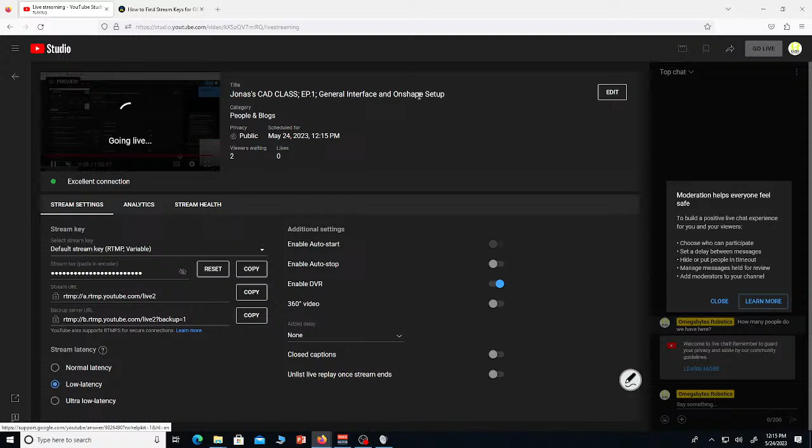My team's coming here to make fun of me.

Let's see what we got. I announced the things, I pinged everybody. Yeah, you announced it, everybody's pinged.

I'll just have no people show up. Yesterday was a nightmare. What's your bit rate for your stream? 8,200 on Ethernet. I'd be worried if you're doing that on guest internet.

Actually, I know how to increase viewership. Watch this.

Jimmy's here as well.

Now we watch. We're waiting on people right now.

Yesterday I had like 10 people, and they all slowly went away. Everybody but us is in school right now.

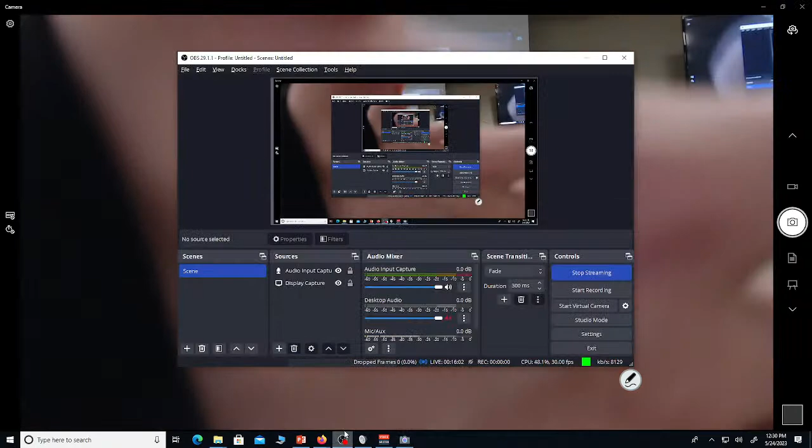He doesn't get it, why do I have PowerPoint open? Oh, PowerPoint open. No, I said don't open PowerPoint. I hate everything.

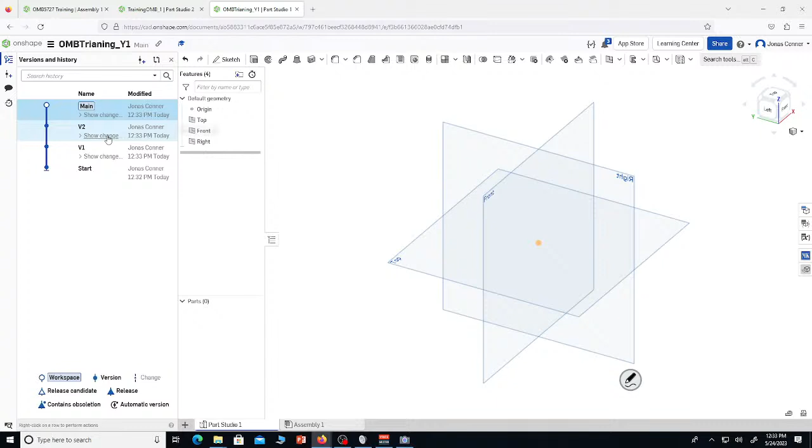First, I want to talk about versions. When you're creating parts and robots, you can create versions, which will allow you to say, okay, here's this version, and then I did some edit, and now I have this new version. So if you have your robot and you're like, oh, I want to change the intake on it or something, you could create a version so you can go between them and say, I want this version to have an intake made of plexiglass with a hex shaft, or this intake made of compression wheels. So it's pretty useful to have different versions of things.

Up here in the corner, there will be this plus key that has feature scripts. This plus key will have different feature scripts, and they're really useful because there are certain feature scripts that allow you to import mathematical functions to create helixes and things like that.

Other features were like, for instance, you don't have to follow along with this. If I had a cube, and I had a hole here. So this hole right here is like, I want this to be a screw hole maybe, and there's a feature script called internal thread, and all you do is just hit the inside, and it'll create threads for you. I don't want to use this tool.

Other one, old thread creator. And it will just create threads for you.

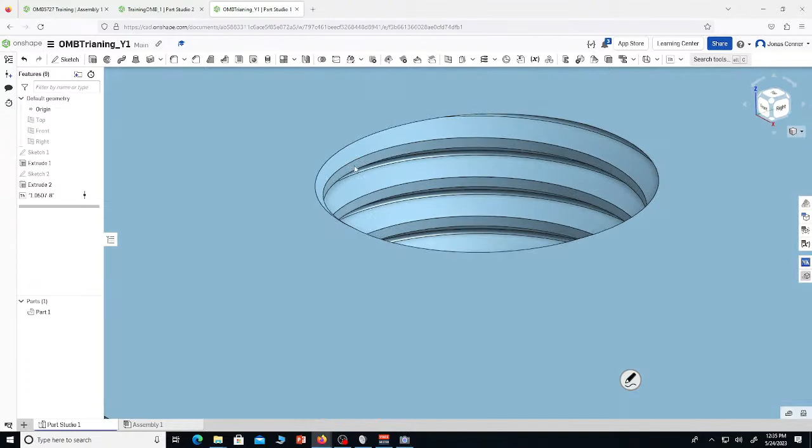Ordinarily, you'd have to create a helix and then create your thread in a triangle, and you'd have to measure that out and align it perfectly to make sure you're in the ISO standard of screws, and then sweep it along there and cut both ends or extrude both ends to make sure that it's properly aligned. This just does it for you all in one batch, so it's pretty useful to have.

We'll go over all of 2D sketching right now. So you'll be right here, your 3D view. You'll have your top plane, isometric. This right here is your different views. You've got isometric, which is your kind of standard view, and then different versions of that, trimetric. You've got different shading settings.

You've got things you can make. Up here, if you want to export a part, you can always print it. If you have the enterprise version of Onshape, which is a paid version, or maybe you get a sponsorship for it, there'll be a whole render studio that allows you to render out parts, and they're actually extraordinarily high quality, very photorealistic. So that exports that image and it ignores the background, which is really nice.

So over here, Sketch, big Sketch button up here, is Shift S. If you get to know your hotkeys, it's really useful. And then this little cube right here is for your adjusting of your view. We're going to go ahead and go to the top plane.

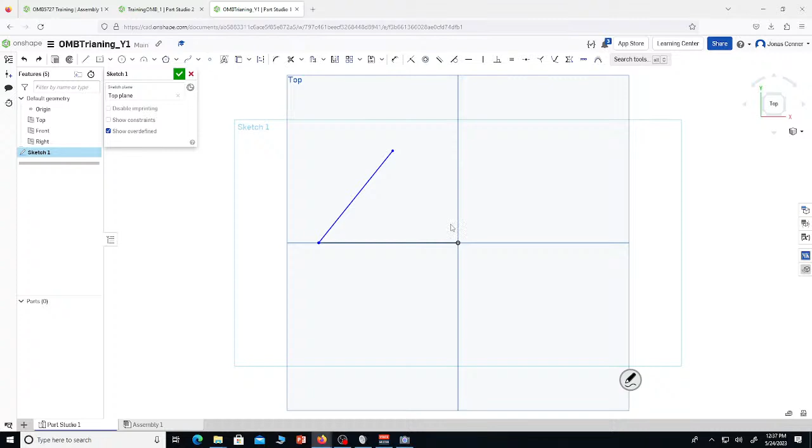So L is for line. Line is up here, simple enough. Lines. Command Z or Control Z, depending on Windows or Mac, for undoing, and then redoing is Command Y, or Control Y on Windows.

Square, there is a corner rectangle, which will be like that, and then you have a center point rectangle, like that. Generally, you'll be using center point rectangles. Then an aligned rectangle, which is basically a 3-point arc, but for a rectangle. These are nice for intakes and things like that, where you need it to come out.

Circles, you've got your 3-point circles. I haven't ever had to use these in modeling, except for like prototyping, but you might find a use for them. You've got your standard 3-point circle.

And then you've got an ellipse. Ellipses are good for making slots for bolts to go through and things like that. So you've got your length of the ellipse and the height of the ellipse. And then 3-point arcs are perfect for like, if I've got, let's say, a corner rectangle right here.

And I want to smooth that out. I can easily use a 3-point arc right here. So you click your 2 points, and then this is the radius. I can make it aligned to those. You can see those little yellow cubes that show up, which means that you're perfectly aligned to whatever it's moused over. So that's easily made for capping that, making it smooth.

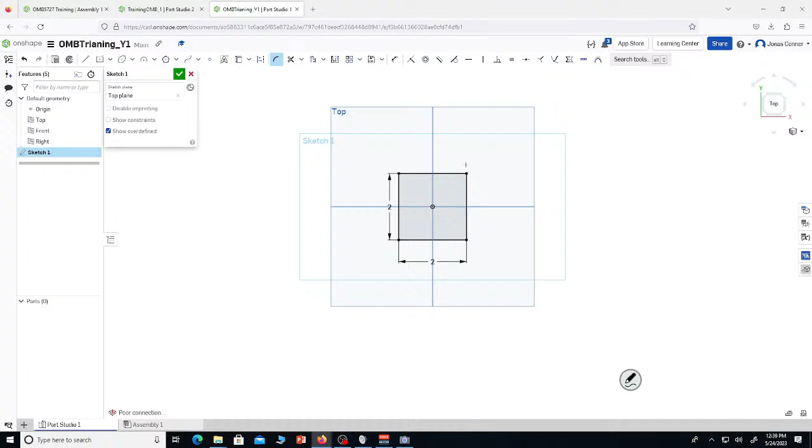So if you were to have a cube right here, and this were to be like, let's say your intake, and then like these corners are going to be touching the cube, you want to select your fillet here, which is Shift F, and smooth those out to however much you want. But you can smooth those out, and then now that won't pop a cube.

That corner might, like if you cut this out on metal or plexiglass, that might pop a cube, but those corners wouldn't. And it saves you, if you're cutting your own parts out or you're having a company cut them out for you, then it really saves you a lot of time on having to file that down yourselves or having a freshman do that for you.

So make sure to fillet any parts that are going to be touching game pieces, and even those that aren't, in case you have something hit or somebody who's messing with it and might get injured. So it's always good to fillet down parts.

You've got your trim, which is for like, let's say I've got a triangle, and then I want to trim things out, it allows you to just cut it out, cut different parts out. So if I've got like a line that I don't like or something like that, you can trim it. I can extend things and split them.

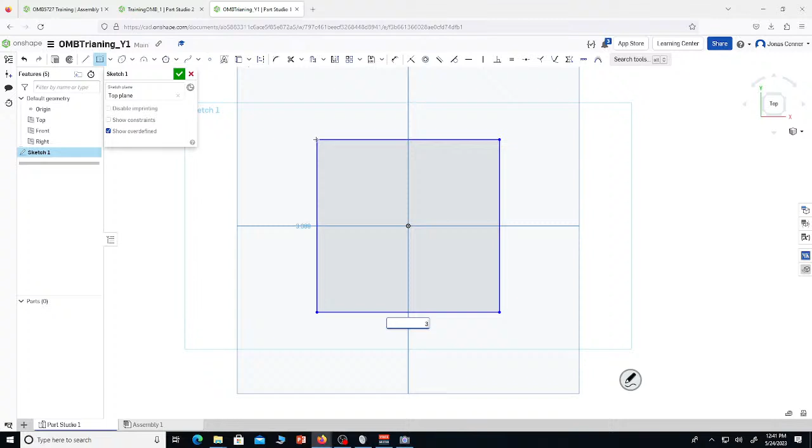Offset's a really useful one. If I have like, let's say I want to just quickly model the chassis of a robot, and then it'll be like 32 inches, I'm making it 3.2 for scale. And then I want to say, okay, I want a 2-inch beam on every bit. I can offset this whole thing.

Offset the whole thing. So drag it all, select it all, enter, and then say like 0.2 inches, 2 inches for scale. And then now I've got this part right here that represents the outside of my chassis. So that works really nicely.

These are your constraints. So if I've got a bunch of lines, if you see that little yellow dotted line that goes on your line, that means it's either aligned to something or it's connected to something or whatnot. So there's a yellow dotted line right here, to represent that it's aligned perfectly to this point.

Let's say I move it over here. This yellow dotted line right here is to represent that it's aligned horizontally. And then this is for vertical. You can see the little yellow dotted line on the line.

But you can always edit constraints. Like if I do this and I'm like, oh, I don't want this line to be horizontal to this, I want to be able to drag this line downward. You can always just select over, mouse over whatever you have, select that and then delete it. Delete your constraints. And now it's just vertical.

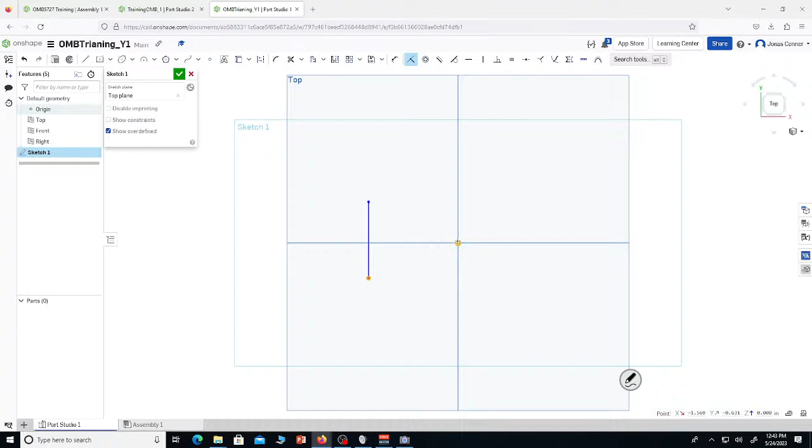That's the only constraint. But then I can mouse over this and say, oh, I don't want this vertical constraint anymore. And all of your constraints are up here, they'll either be in a drop down or be like this. Coinciding is probably the one you'll use the most. It's like, oh, I want this here, over there. If I'm designing, let's say, this is the 2D side view of a robot.

Let's say my chassis is 32 inches by 2 inches. This is the chassis of my robot. I'm going to hide the planes.

Let's say I've got a virtual 4-bar here that's sticking out like that. Or actually a real 4-bar. This is a real 4-bar. So I can mouse over this and make sure that they're always horizontal to each other.

And then I can click both of these lines and set them both to be parallel or equal. That's equal, I meant to do parallel. So undo that, and I can set these to parallel.

Now what I can do is get a point like that. Click this and this and make it coincident. Now I've got to dimension this as 20, 30.

Now I've got a prototype of a virtual 4-bar, or a real 4-bar, sorry. We've been using virtual 4-bars a lot. So now I've got like a prototype of this. And if I want to set this as, oh, this is going to be 8 inches.

Now I've got a 4-bar. And then I could say, okay, how tall is this off of the ground? I can go over here to the measure tool and say, okay, this is 9 inches off the ground right there. So that would hit.

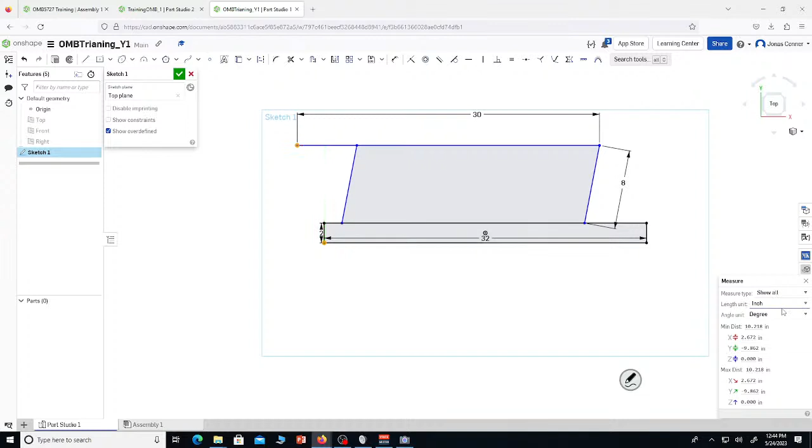Jimmy, how tall is high? How tall is the mid goal? Like a couple feet, right? 2 feet.

Okay, 38 inches. So now what I can do is say, okay, I've got a 4-bar that's going to go all the way back here. We've got one that's going to go all the way back here. And then these are going to be parallel.

This is going to be, I don't know, whatever it is now, 30. Now I've got a 4-bar that goes back, folds up all the way back here. And that extends a lot more because I said it'd be whatever. Dimension that, say 28 inches, that works.

This is now longer. So now this design, if I were to build it in real life, could easily - now it folds up all the way back here, but it could easily reach up, and let's see how tall off the ground this is.

39 inches. That's mid, right? Yeah, so that could hit mid. And I might not have had the confidence that I could make a robot with a 4-bar that could hit mid. And if you do a little redesigning, you can actually find out that you're able to make a 4-bar robot that's able to hit high. So that's pretty nice. And that's kind of one of the useful things about doing a 2D CAD sketch early.

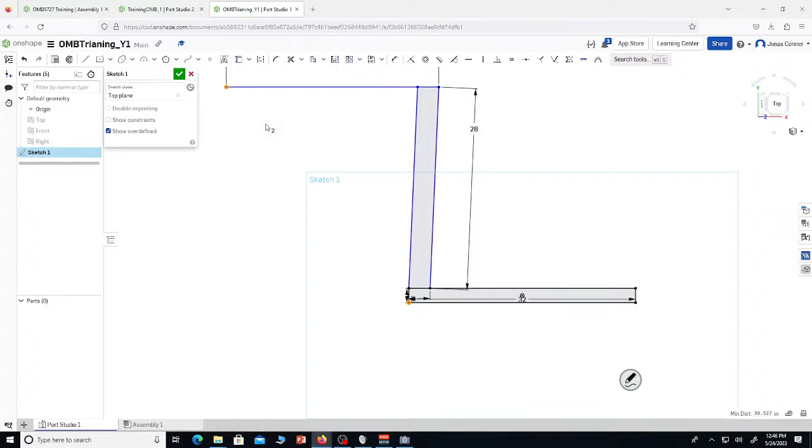So I'm going to start showing specifics on how to do things. So if I were to say I want to make a chassis of a robot, we're going to go make a bar. We're just going to make one bar of the robot.

Say, okay, it's going to be - what's our chassis dimension? 25 by 29. Okay, so we're going to do a 29 by 29 robot. Actually, we'll do a 30 by 30 robot. So 30 by 2.

So I hit Shift E to extrude, and if I go into my sketch, it goes back into it. The extrude button is here, revolve is here. We'll go over revolve in a little bit. You've got your extrude. And I can always edit this sketch and say, oh, I want this to be 1 or whatever, and it'll edit it. So I've got this bar right here.

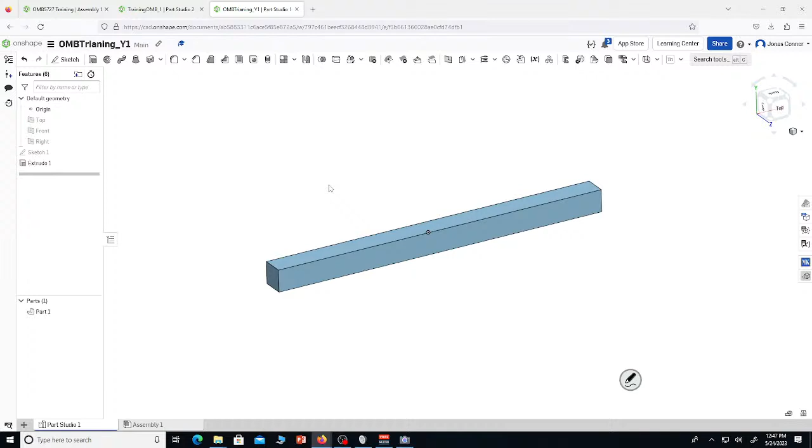Then we'll put some holes in it. So we'll create a sketch, Shift S, create a sketch on here.

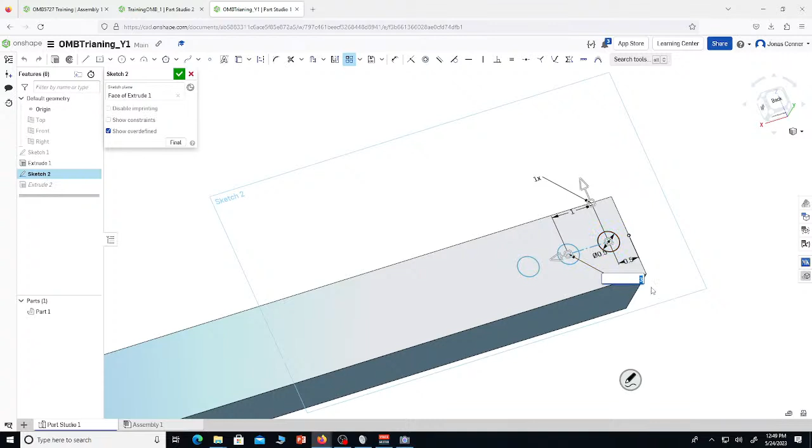Linear patterns are probably one of the most useful tools in CAD, period. I can set this to negative 1, so the holes are 1 inch apart, going in the other direction. Then I say I want 30 of these holes, and it won't render the middle holes, just the start and the end.

Click anywhere off of it to deselect, and it'll update that part, because the extrude has faces of sketch 2 selected. So I can go over and click sketch 2, and it'll select all the faces of sketch 2. Now I've got this beam with holes.

What I can do now is go to my assembly.

So go to my assembly — any questions? No questions. Go to my assembly, and I can say insert, then select this bar right here.

Now I can insert like 4 more of those. Imported 4 of those — I think I imported one too many.

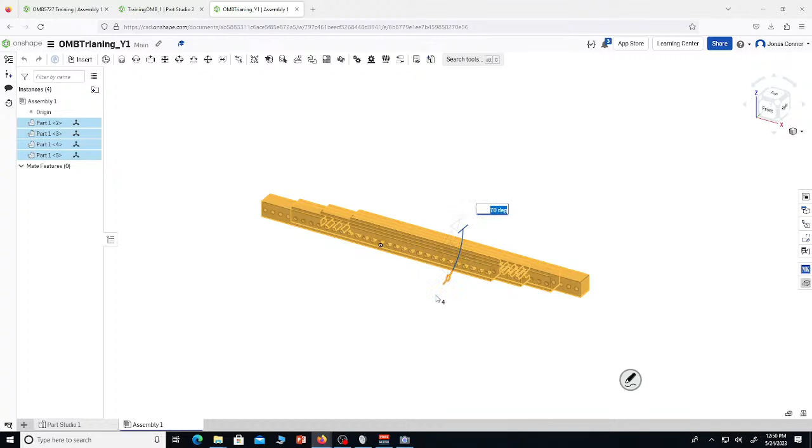So then I can take each of these and rotate them 90 degrees.

Andrea, you paying attention? Andrea. I'm going to steal her drink. Give me a second. Andrea fell asleep in my class. She's not very dedicated to the learning experience. Some people just aren't on that grind.

Okay, set this at 90 degrees. You paying attention? You better know how to do this when we're done.

You had a dream about it? And you know why you had a dream about it? Because I'm teaching it.

So I can say, oh, I want to move these around. Okay, so we'll have these two here. I can go to my top plane and say, okay, I want this part to be here, and I want this to be here. And then I'm going to rotate this one.

90. And rotate this one by 90. I'm not mating these or anything, not connecting them mathematically. I'm just using this as a reference.

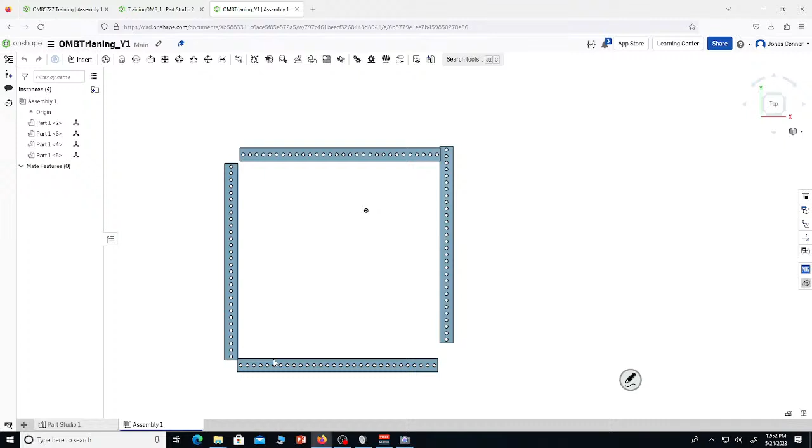So this has taken me about 5 minutes to do, and if I wasn't teaching, it'd take far less time than that. I could say, okay, connect these right here, and boom, there's my chassis. Or I could use corner joints here so that the chassis is perfectly square. I could say, okay, this is my chassis.

Real quick, I want to go over to the App Store. Go over here to the App Store, and you've got all sorts of different stuff. You've got free data management, free simulate — now, most of the stuff costs money, but you can look for free. There's all kinds of free stuff. This is free — you can import Google Sheets to reference off documents, all kinds of stuff.

What we're going to look at right now is MKCAD — the MKCAD library. This right here has every single Onshape, or every single FRC part, every battery, nut, screw, bolt, hex shaft, whatever.

So I can go over here and say, oh, I want my swerve modules, and I want a Mark 4i swerve module with a Falcon as a steering motor, or a Neo as my steering motor, and a Falcon as my drive motor. Insert. And I could say, oh, I want a Swerve X with 2 Falcon 500s, and insert that.

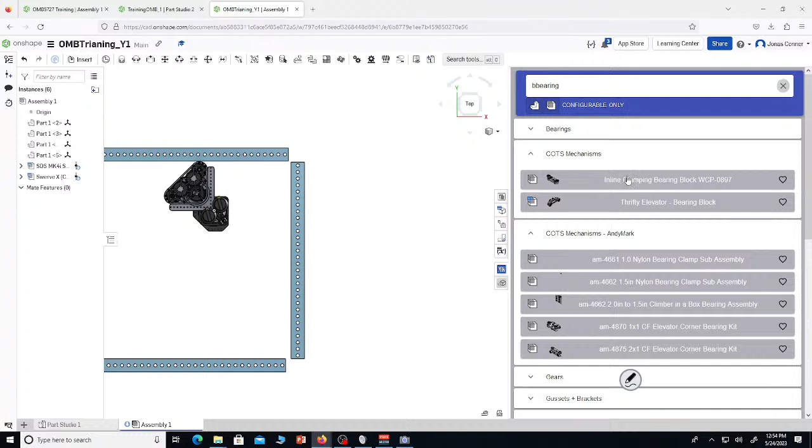It's like, oh, those will need bearings, and look — I can find the specific bearing that I need. It's got every bearing, every wheel, every piece of wire — literally everything you could find in your machine shop.

FRC — you've got pulleys, pneumatics, motors, hubs, gussets. There's literally everything in here, every single part, and it's all cloud-based. This isn't taking up any space on your computer. It's even got the game elements here, so I can say, oh, I want to test my robot in Onshape.

I can click the cube and the cone, and I can say, oh, I've got my entire game piece. This is my scoring field. I can ask, could the robot come up and grab from this? So I can test this all virtually, really easily.

You won't have a problem with SolidWorks or Autodesk products if you've got a powerful computer, but when you have this, it just makes everything so much more convenient.

I can take these swerve modules and say, oh, I want this to be over in the corner. Just move it around. I'm gonna align that right there.

I'm not doing this mathematically, I'm not mating anything - this is just quickly done. I'm not using any tools to do this, I'm just dragging everything around.

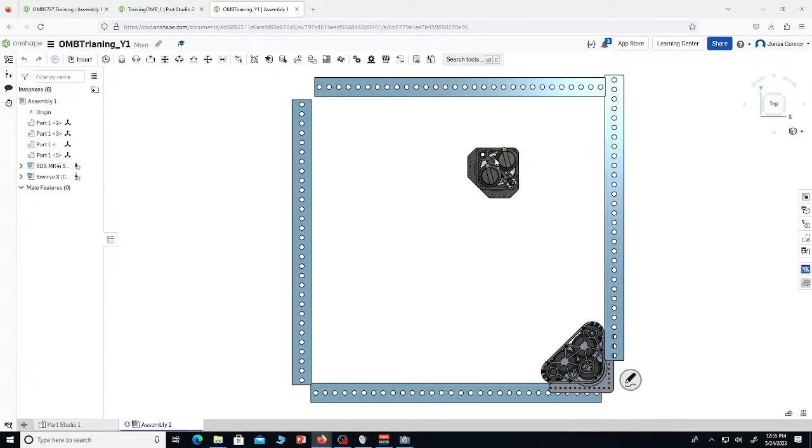I'm gonna attach my swerve module there, and say, oh, those holes I made don't align - this wouldn't work. Then I'd go and remodel that. Go over here - those holes don't work either. And the wheel's too far off the ground for it to be legal, et cetera. So this is just a quick way to get rid of imperfections in your design.

I'm going to be right back really quick, just for a moment. Just hold on, I'll get back to it.

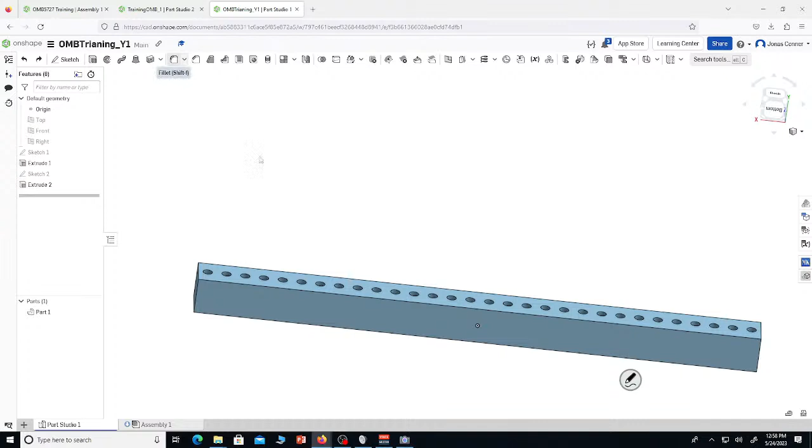I don't know, you fillet your parts, you're not going to pop your cubes. It's that simple. There's probably more popped and broken game objects this year than all the other years combined - I mean, those cubes were basically made of cling foil.

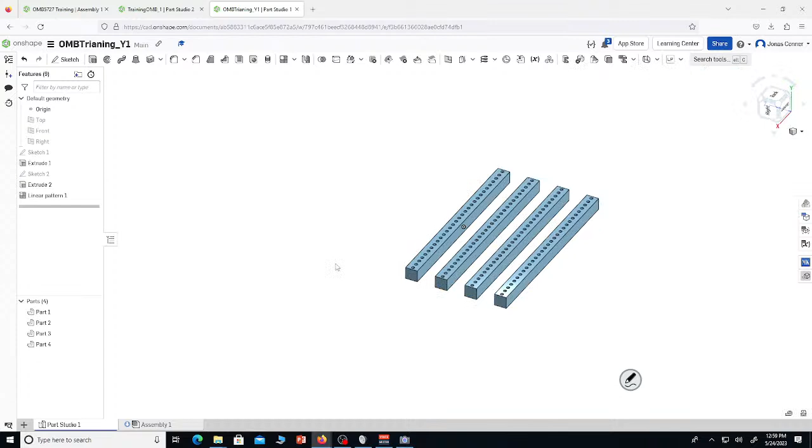So that's a linear pattern. Rotational pattern, circular patterns are pretty nice too - I'll show everybody an example of what those are good for.

I'm gonna get rid of all that. So if we've got like...

We'll unhide our planes, hit P. We'll go to isometric view, and then I'm gonna align ourselves to the top plane.

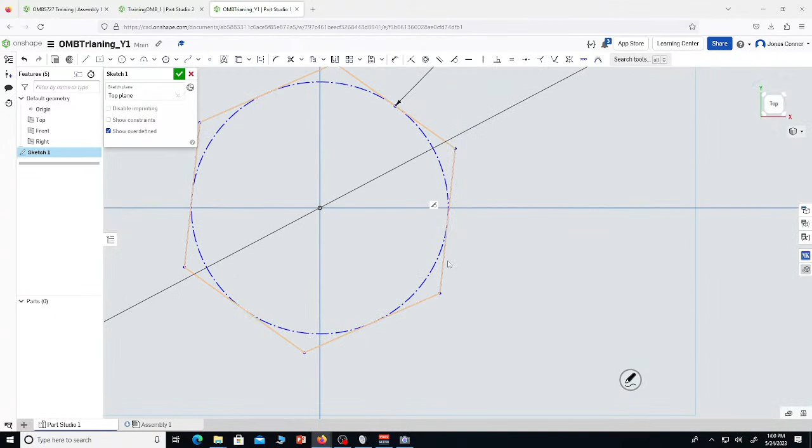That a 6, because hex shafts have 6. We'll make a line from the middle of this to the middle of this, and then make that horizontal so that our hex shaft is like that. We'll make it a 1-inch hex shaft.

And then let's say I've got here, and then my motor, I need like screws or something like that. What I can do is make circles here. I can say, okay, I want a circle right here, and I want a half-inch circle right here.

And say, oh, I want a circular pattern. I can select this, and it'll do it for me. There's a little box right here I can move around anywhere I want, and it'll move the circular pattern. And then I want, I don't know, 7 of these holes. You can set it to be any number of holes. I want 6 holes. Now it'll make these holes, and then when I'm cutting out whatever part this is, I can easily just extrude this out like an inch.

Extrude this out like an inch. Actually, I'll do like a 1/4 inch.

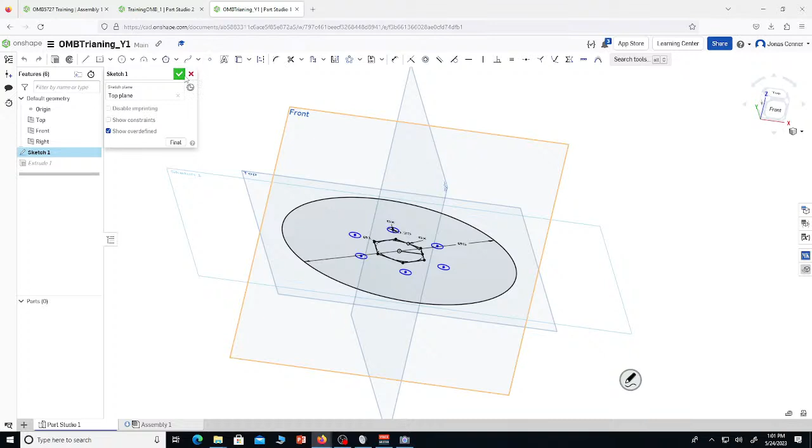That was a good time to mention: when extruding parts, or when typing anything really, so this extrusion, I can say like a 1/4 inch part. But I can also say square root of 16, right? That's 4. Or 1 over square root of 16, that's a 4th. Or I can say 1 divided by 1 over... you can do any mathematical operator you please in here. So if your math teacher decides to have you model something, you can impress them with that.

So this would be like my plate that I'd cut out. I'd stick a hex shaft through there or whatever.

We'll go to our public document real quick. This is our public Omegabytes document. This is this year's robot.

One thing that's nice: this larger assembly, it takes a while to load. It'll take a minute, but even on a good computer, an assembly like this in a non-cloud-based software could take forever to load. Honestly, we've been using SolidWorks for like 7 years, and every time we try to open an assembly on an updated version, or an assembly that we added some part to, half the time the assembly would crash and we'd have to go back and fix some part.

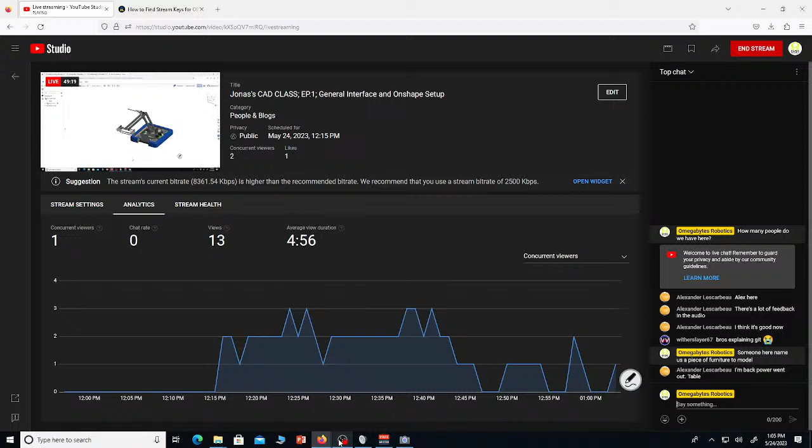Table. Alex says table. We're going to model a table.

Okay, we're going to let that rest. If you have a computer that wasn't made in 1990, you should be able to load the large assemblies.

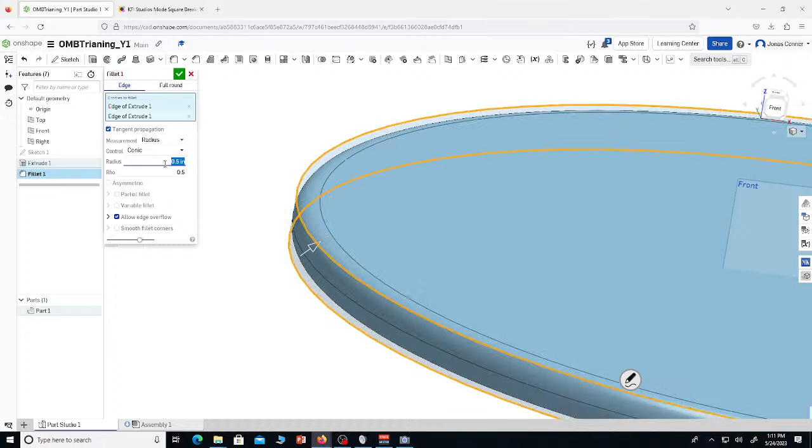Now I've got 2 fillets going on here, so it's a little bit smoother of a pancake. I can right click this part and set the appearance as well. Edit appearance, and I can say I want this to be gray. There we go. I'm gonna go ahead and hide my planes.

How big is this? I'm gonna say that's 4 inches. So that little yellow cube right there, little square, you can zoom in and see it. So that, and then it's selecting this center point. That means that I'm aligned to the center point.

So that's a square, hit C for circle. Expand that out a bit, 4 inches. That go up. I'm gonna say this table is 3.5 feet tall. 3 feet, 3.5 feet.

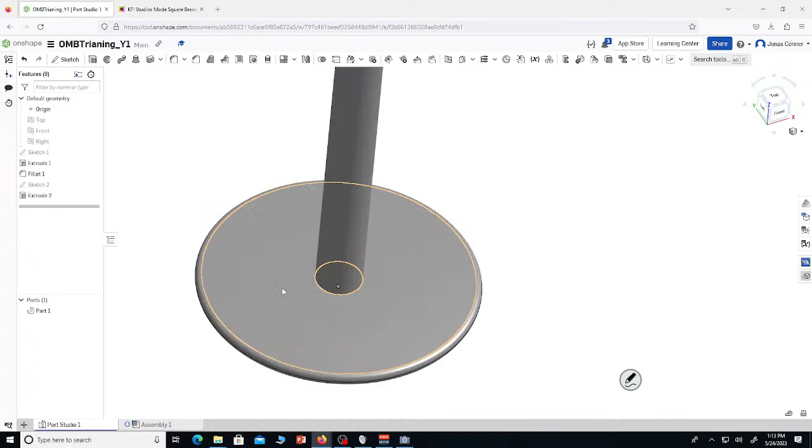There we go. And then I can fillet right here, like 1 inch, 2 inches. And boom, now I've got that. And then I can also select the shaded without edges. Now all of those little lines are hidden, it looks a lot nicer. Yeah, so that's all one part.

And then I can say, okay, this goes up, and then this table, we'll say that's like 1.5 feet by 1.5 feet. So I can create a sketch on top of this.

Now once I create a sketch, I should have mentioned this a lot earlier, but once you create a sketch, I can say, so I haven't clicked anything. All I did was create a rectangle, hit the middle, then expand out, and say 1.5. Now I immediately just started typing, and it'll dimension that. So it'll immediately automatically dimension that stuff for you if you were to start typing dimensions once you create a rectangle. So I can say 1.5 feet, 1.5 feet.

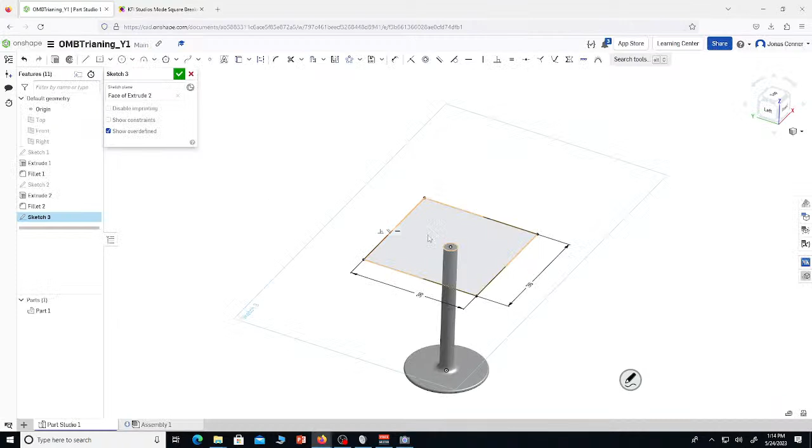Now it actually looks to be significantly bigger than that, so we'll say that's like 3 feet. There we go. And then I can say, okay, that's probably like 1.5 inches tall. I'm just kind of eyeballing it, you know.

The best way to get practice for modeling is to keep doing. And I can actually make this a new part, so I can have the top and the bottom of the table be a different part. But what I can also do is have it be the same part, right-click this feature, and then say add appearance to feature, and make this like a wood color. And then boom, now I've got this table kind of done.

Need to fillet out all the edges of the table. Maybe I can get away with full rounding it. No, I can't full round it. So I can say like, okay, fillet out this top face here, bottom face here, and then make it like less than that.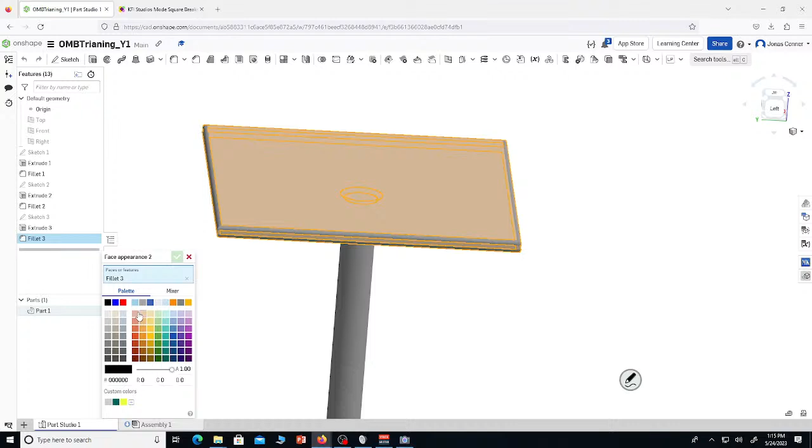I created a little kind of cool little design. And then I kind of added the appearance to this feature and say I want this to be wood color. Then I can select this face right here, bottom, these faces that are created by the fillet.

Tomorrow I'll have a little thing that displays what keys I'm pressing while I'm pressing them. Just to add appearance to these 5 faces and make this like a gray.

And then I can go over here to my appearance tab, and I want this part to be that same dark gray.

And now I've created a nice looking table that I could easily right click here and export as an STL, and 3D print this out to have a nice little table.

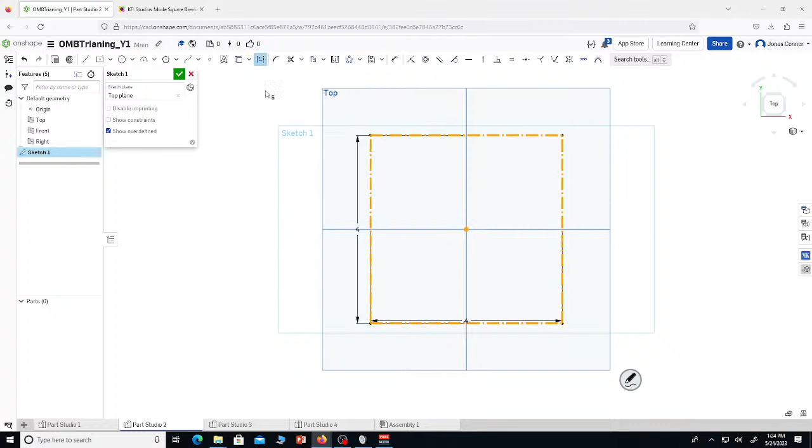Now what we're going to do is select all this right here, and we're going to make this construction geometry. Boom, so this is construction geometry. Now when I extrude it, it doesn't count, basically. It just doesn't exist when I try to edit the part. This is purely here for reference.

Now what we're going to do is create a rectangle right here. Now this is a really important lesson, what I'm doing right now. So if you've got anyone not tuned in, make sure to get them to tune in. This will be pretty significant, because I'm going to hit a lot of important things on this part of the video.

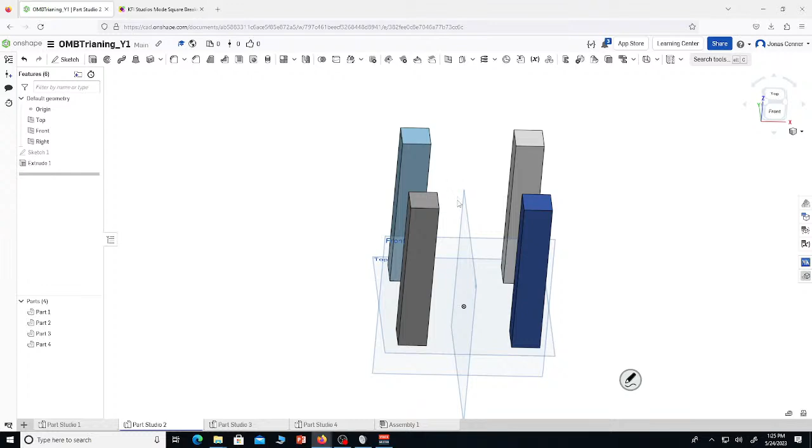There we go. So this will be the 4 legs of our table. I'm going to extrude these. They're going to be so just tall, pretty tall table. Okay, so now I've got each of my individual parts. Now we're gonna make an end table. That'll be the type of table we make.

Now I did this yesterday, but yesterday was kind of just a test run day to make everything work, make sure everything works.

So we'll go over. I don't want to be in shopping, I want to be in images. I found a really good table. This is our table from yesterday. So I can easily download this image. I already have the image, so I can replace it.

And then what I can do, I go into this front plane sketch right here. Hit the front plane, and then I can import an image right here as a reference, which is really nice. But what I'll have to first do is import this image.

So I'll import that image, and then I can use that image, and I hit that, and then I can drag it outward. Actually, I'll redo that. I don't want it defined to anything, so I'll just tab the image, and I'll put it over here. And then boom, now I've got my reference image, and even if I complete this sketch, it'll still be visible. It'll only go away if I hide this sketch right here.

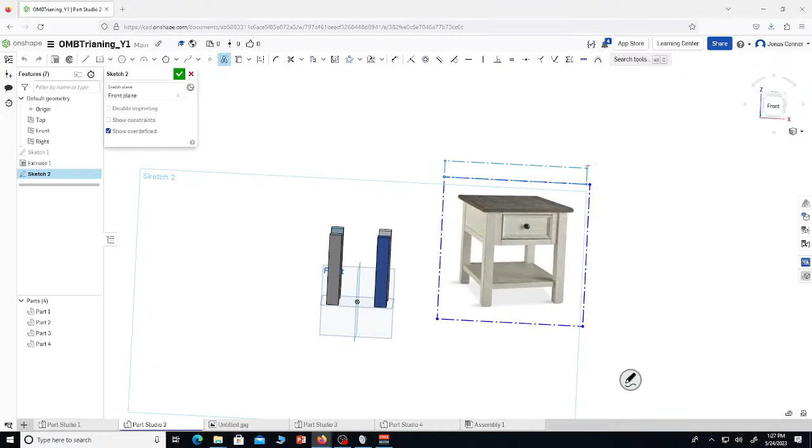So this sketch is basically just that image, that's what it is. And I can even go in here and put some text up here, say like, oh, I want this to be... I'm gonna move this around over here. Yeah, okay, that's my table.

So now I've got my end table, and I kind of want to say, okay, we've got that top bit kind of cube into there. This little thing kind of goes into it. So what we'll do is we'll create a plane.

What we're actually going to do is this bottom bit here first. So we'll create a plane here, and we'll use the top plane as our reference, and we'll offset that by like an inch.

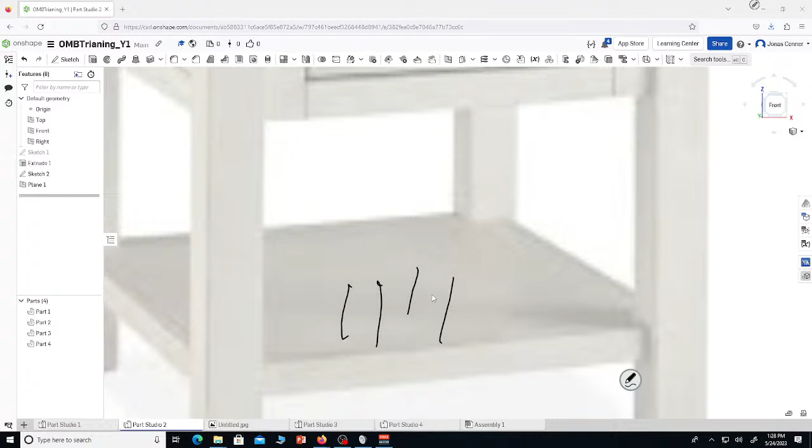So we're making, just to be clear, we're making this little section right here. So you've got your table. We're making that bottom bit. Got our table. We're making this part right here. We're making this part of the table. This right here. This is what we're making. This part right here.

If you're wondering how I'm doing the drawing, I have a tablet, like a Smart tablet - that's the name of the company that makes them. From the college that I'm at right now.

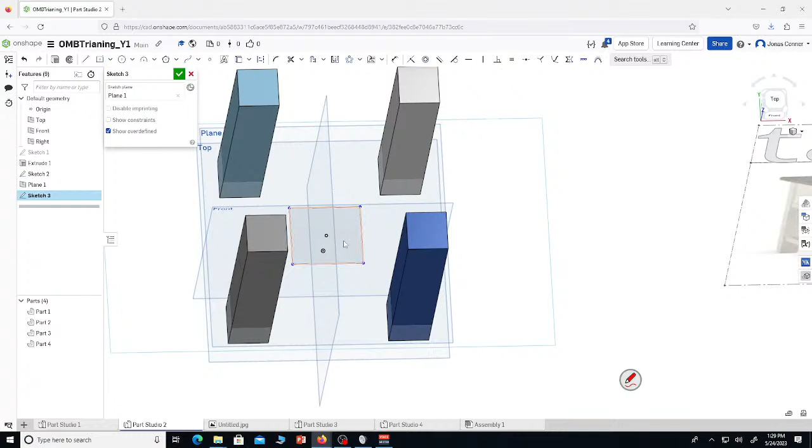Using their stuff. So I'm gonna make a square right here. I'm just gonna put it right there. Notice I have it aligned to the center. And what we're gonna do is I'm gonna make a line.

So I'm gonna hit U. This allows me to basically take any geometry that I want and just grab it. So if I have like this corner over here, I can put that down onto that point, right? It puts it down onto this plane. So if anybody has any questions about that, ask them. But I click any geometry and it just basically puts it onto that plane that I'm sketching on right now. It'll just use that as reference.

So now we have this. I'm gonna say this is like, I'm gonna make a line. Goes this way, like, I don't know, an inch. No, not an inch. Okay, what we'll actually do is make two lines that go this way by like 0.2, and then this way by 0.2.

What I could do instead, now this isn't the same measurement, but if I want to do one line, I could say like, oh, this is going to be, what's the Pythagorean theorem? The square root. I'm going to dimension this as like, I don't know, square root of 2 plus - I haven't taken math this semester, so I'm a little rusty. Calculus 1 was last semester. I don't know what that is. I don't know what I just made.

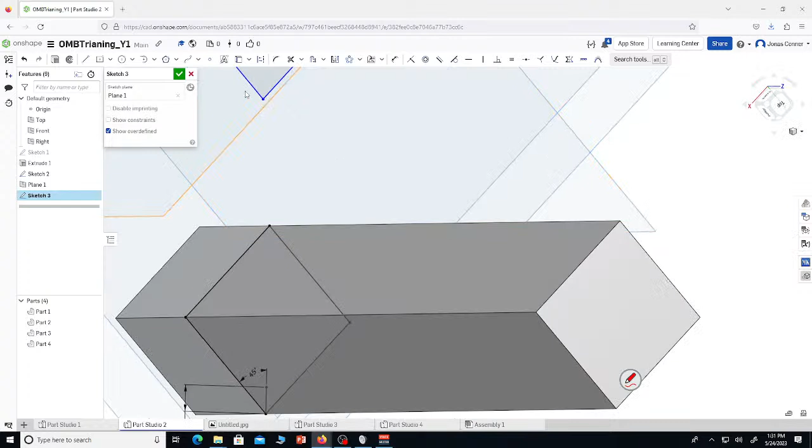Okay, and then we can hit D for dimension. This is an important part, pay attention. If I hit this line and this, I've hit 2 lines. I can make a degree, I can say this is 45 degrees. Now it's perfectly facing the center. And now what I can do is hit this point right here, and this point right here, and it'll make it coincide.

So then I can hit Shift E and extrude. Get rid of all that, I just want to extrude this face right here. And then I can hide this part right here. Which part is that? I'm going to hide that part. Extrude that, and then hide that part. Extrude that. So now I've got all the corner bits selected, right? Double check that, so I've got all the corner bits selected, everything I want.

And I can make it symmetric, 0.2. So making it symmetric, so this yellow bit is the plane, right? Yellow bit's the plane, so it's extruding this way, but if I make it symmetric, it'll do half as much both ways. So I'll make it extrude through. And then I can show all this.

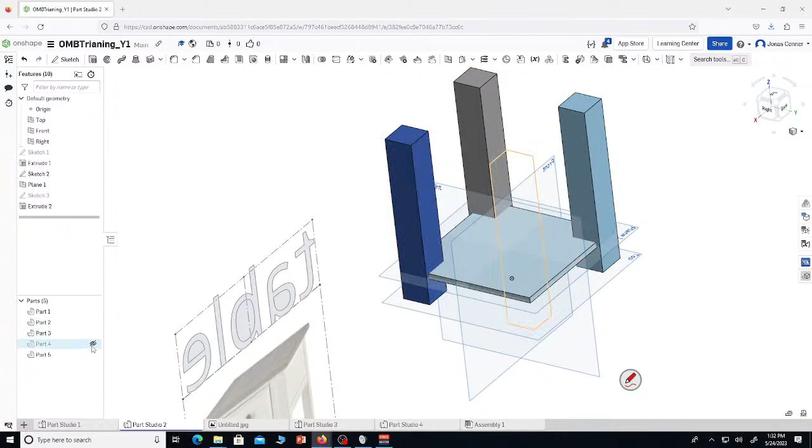And boom. And then what I can do is, now that I have that, right, so that's that middle bit right there. You know, it doesn't quite intersect the edge. I can do the same thing with the top plane. So what I do is create a sketch and then use this geometry right here. Then I could just extrude it downward.

Do that arrow and make it go the other way, and then say like, boom. And then now I've got my table, right?

And then I can go on top of this, make another, like, let's say 5.2, I guess that's probably a good measurement. Screwed that up by like, you know, a tiny bit. And boom, now I've got kind of the same kind of shape going on. These are obviously a lot thicker, you know, it's a little different, but it's good practice to do things like this.

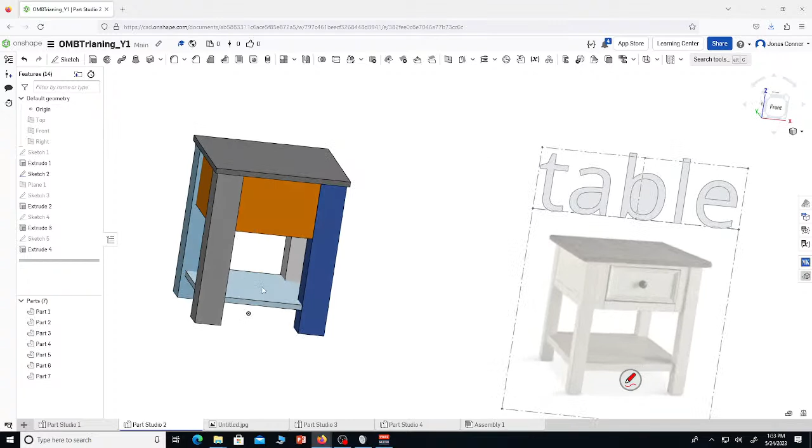Now you've noticed I've made these all individual different parts. We'll get to that in a little bit.

Then I'll just do the front drawer real quick. I'll go to the front plane. Okay, I'm on the front plane, sketch out that drawer. We'll align to the middle of that, and then the middle of this line. We'll take the center of that and go out just a bit.

2.25 and 1, and we'll remove that bit there. Then we'll take the inside of this right here, and we'll offset it. Put a sketch on there. Then up here is offset. Offset that by like 0.05, then extrude the drawer back out.

That would be like 1.05, stick out the tiniest bit. Now you can see the drawer kind of goes out a bit, and then it goes in, and then it goes flat, and then you have the doorknob, right? So what I can do is say...

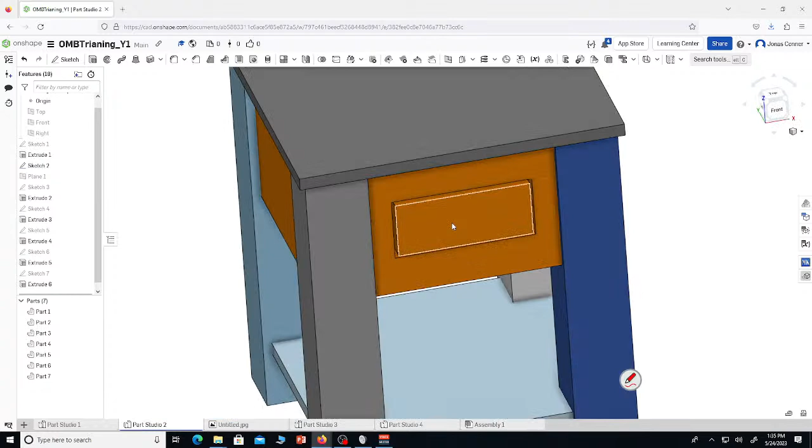Create a sketch, and then offset that, have it go the other way. I don't know, 0.5. There we go, I will say 0.1. And then extrude that in. Hit remove. Nope, not surface. Hit remove, and then hit 0.1.

Now in CAD, there's really no wrong answer, as long as you get it done, you know, there's 1,000 ways to do everything.

And then I'm going to actually make that, what I'll do is make that fourth as much. Hey, hello, okay, the lights just came on for some reason. I don't know.

And then we'll chamfer that, 0.1. Okay, that goes in a bit.

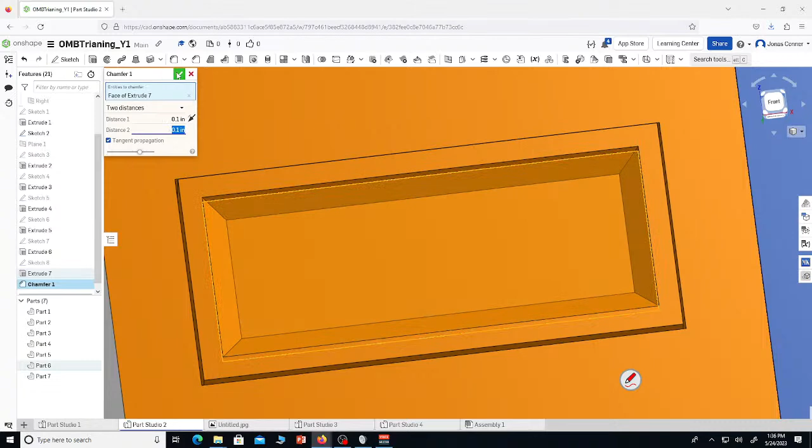Now, that's not the only way to do it. What I could also do, like I said, there's 1,000 ways to do different things. I could also just straight up extrude this, remove, say 0.2, and then draft, which is used for cast molding, but you can use it for whatever you want. You can use CAD for whatever, you don't have to, you can be a rebel, you can go outside the constraints. So I can just draft this by 30 degrees and say, okay, now it makes basically the same part.

So this doorknob, right, it's kind of a round thing. Now, of course, I could do like a cylinder and then fill it in, but we're not going to do that. What we're going to do instead is say, okay, this drawer knob, can't really view the side of it as much as I want to.

Jimmy doing? What's Jimmy doing?

Jimmy's gonna get smacked. This is what Jimmy's doing.

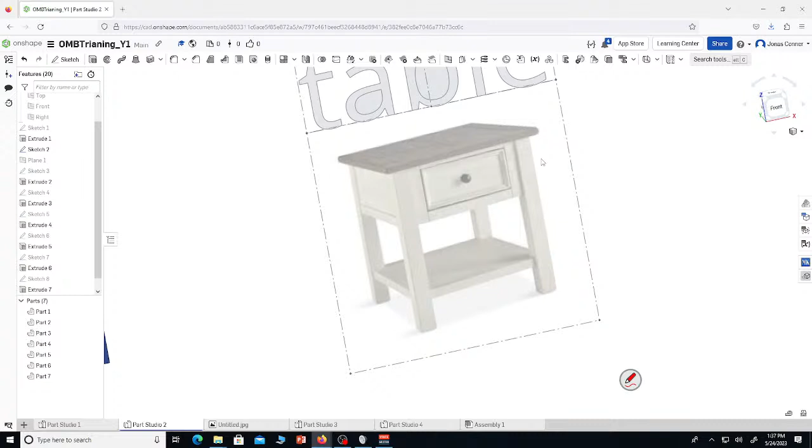So we've got this table. From the side view, this is what the doorknob kind of looks like. From the front, you're looking at your drawer, you've got your knob. From the side, what it probably looks like is this. And then the person comes over here - I'm no artist, I'm an engineer - comes up and grabs this.

Okay, so that's what the drawer knob looks like from the side. What we're going to do is say, okay, I've got this, I'm just going to model this section right here, and then I'm going to revolve it around this line right here, and it'll just extrude it out. If you don't understand, just follow along, bear with me, you'll get it in a moment.

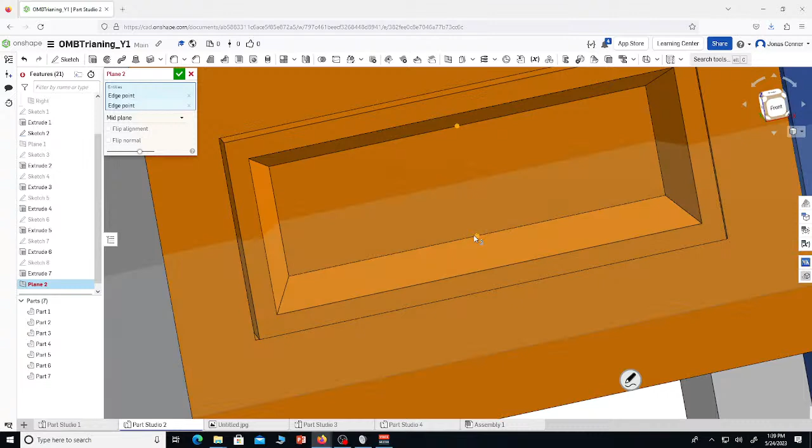So we're going to create a plane here, a mid plane. I'm going to select this line right here, and this line right here. Actually, no, what we're going to do is not select the lines, we're going to select the points right here, and it'll create a plane right between that. So now I've got a plane right here. We're going to create a sketch on this plane, using this face right here to make sure we're having it, and then we're going to go to the top.

I'm going to say this drawer knob is going to come out like half an inch. Yeah, half an inch. And I can create a spline here, just freehand it, because the side view and the top view are going to look the same. So I basically remodel that, and I can even use my tablet to push that out. I can say, oh, is that going to work? Right, that's what half of it kind of looks like.

Jimmy's over there snickering.

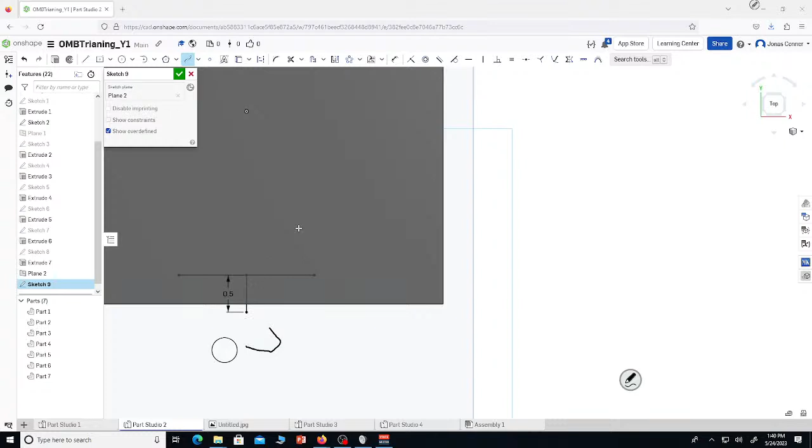I can just freehand that, and align myself to the center of that. And then instead of making that half, now I can just make it coincident - hit that point, say I - and then I can hit this button up here, revolve. That's my face that I'm using, right here. And then the revolve axis is going to be that middle point right there. And then boom, now I've got a drawer knob.

I'm going to make that a new part. So that looks a bit big. Now we're going to show you a new thing called transform. This is just to quick and dirty edit some part. We're going to scale this in place.

The mate connector that we're going to use - we'll enter the mate connectors right here. So if I mouse over this center, this little line on the outside right here, then it'll put the mate connector right there. So what we'll do is, if I were to put the mate connector right there, what it's doing is when I hit scale, let's say 0.5, make it half as big.

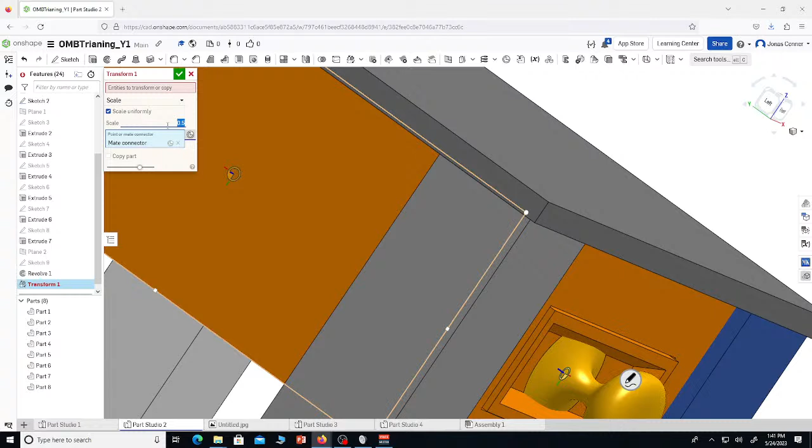Shoot. I want to scale this part right here by a half. What it's doing is, because I selected this right here, it's basically shrinking all the geometry this way. And if I were to say, oh, I want to put the mate connector over on this side, this will be my mate connector, it would shrink everything that way. So wherever you put your mate connector is where it's going to push all the geometry towards, basically. So that's how that works.

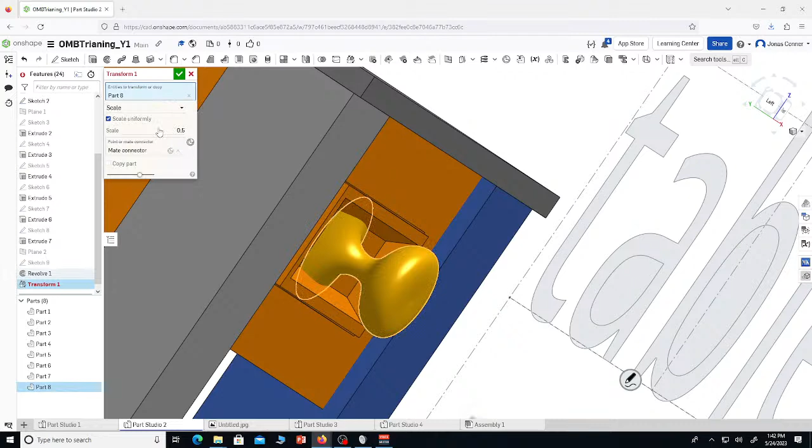And I can do different things. I can say translate by XYZ, which is just moving it - I don't know if you've taken high school math yet, maybe you're a middle schooler, who knows - but you could translate it, rotate it, which, rotating a cylinder doesn't really do anything. But we're just going to scale that by half. And then boom, now I've got this part. Now what I could do is merge all of this together, group this all together, go to a Boolean and union all of these parts together.

All of this, I can just union together. Now this is all one part, so it'd be super easy to 3D print. And I can even go in here and add appearances to faces and change the look of it.

If I wanted to make this a public document, I can change the color - that's a different gray, I don't know if you can tell - or make it just an orange, whatever.

I can do that, but what I can also do instead is go to my assembly - I'm just going to demonstrate mating. So I can import my parts into my assembly. I've got all these parts, and now I want to move this around. Ah, it's not connected. Uh-oh, what are we going to do?

So now we do mates. This would be kind of hard to mate, since I didn't really math anything out - I just kind of did whatever. So I'm going to disassemble this table, rip it apart.

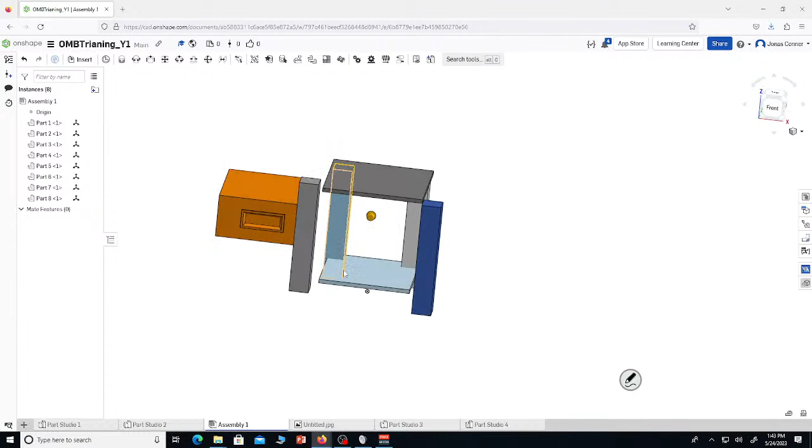First we'll do this bit. Oh, I did something wrong. We'll make a mate connector and put it right here.

And then we'll move it - not realign, move it. I'll say I want it 2 inches that way, 2 inches that way, so now it goes to the corner. So then I can fasten this.

This there, that mate connector, and then this middle part. You can see when I mouse over something, there's automatically mate connectors generated, but if I want to make a new mate connector, like in the corner here, or in this spot right here - there's a mate connector here and here, but if I want it right here, that's when I have to make my own.

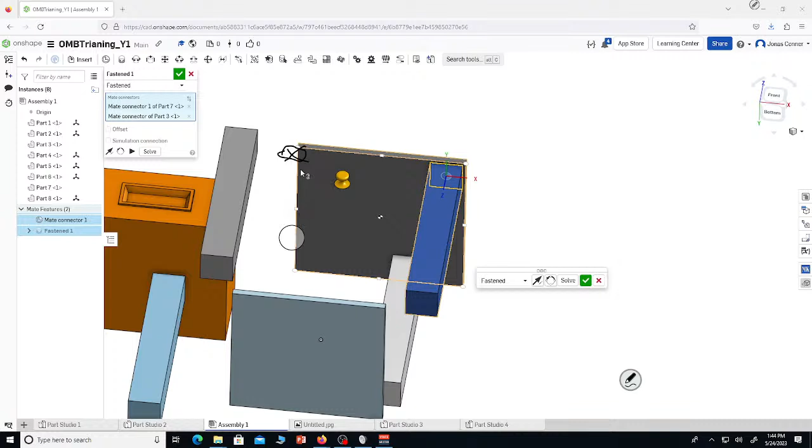I can fasten that, and now these two are connected. I'm not going to do the whole table, but I can also just fasten this and this. I select it.

Sometimes you have to align yourself to the proper point. Then I can drag this, that, and fasten.

What I can do is fasten this right here.

Yeah, oh, what she did - got a marker, did you mark on that? Jimmy's messing up stuff, Jimmy's causing trouble. That's all Jimmy ever does is cause trouble for us. Unless we'd probably be better off with Dustin.

I turned off Jimmy. I used the remote control, so I'll make that -3. So I can set that.

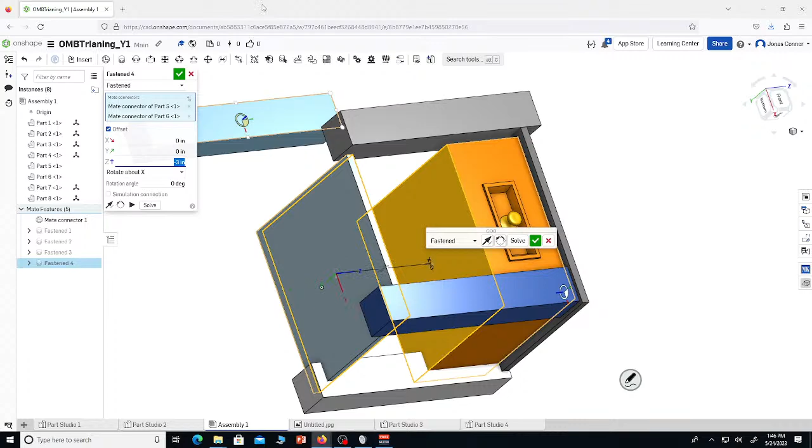I don't know, -2.5 - oh, what did I do? I did something wrong, I messed it up. -2.5. What's this? -2 plus 1. Whoa, math, that's so cool.

So then that's all like that, and this is put together. I don't need to do the rest of this - you'll figure it out just from these.

Okay, so those are these mate connectors. I'm going to use one of my old files to demonstrate. Go back to streaming, see if that... yep.

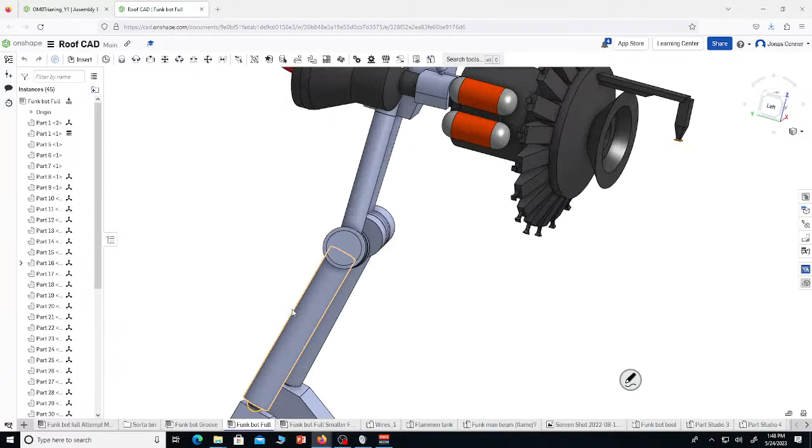Ah, there we are, okay. So this is a little funky little dude that I made in one of my classes when I should have been doing my work. I made an A in that class, so it doesn't matter though.

Well, he's not put together, is he? He's not put together, he's broken apart. Yeah, he's not put together. But you know who is put together? I think this guy's put together. He's not put together either. Okay, I've got to find one that's put together.

There we go. I'm not going to turn the webcam on, Jimmy. Actually, we'll do it. Oh, you mean just have this in the bottom right? Good guy, look at me, I'm so beautiful, I need to shave. I'm looking.

I tried to do that, but this computer right here does not allow that. It just doesn't - OBS is not allowed to record windows for the display window. It just doesn't. If you set window and then select anything that's not OBS, it just shows a screenshot for whatever reason. It's really odd, ever.

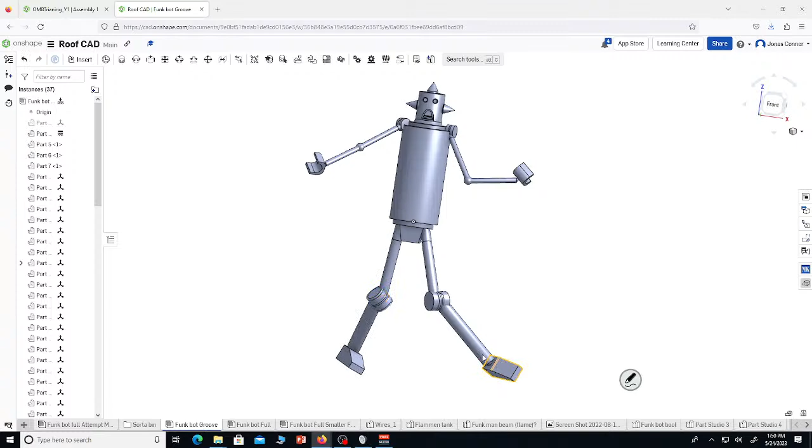He does not pass butter. He moves and grooves. So now this is the amount of parts in it. That's a lot of parts, but none of them are entirely complex. All they are is just cylinders, a circle, some more cylinders, a big cylinder, this trapezoid here. There's really not that many parts into it. They're just a bunch of cylinders that I put in different spots.

This was a couple years ago is when I made this. This was probably the most difficult part to do, right here. All it was, I extrude this thing out. I just make this shape right here, like that shape, and then I just extruded it outward, and it did that.

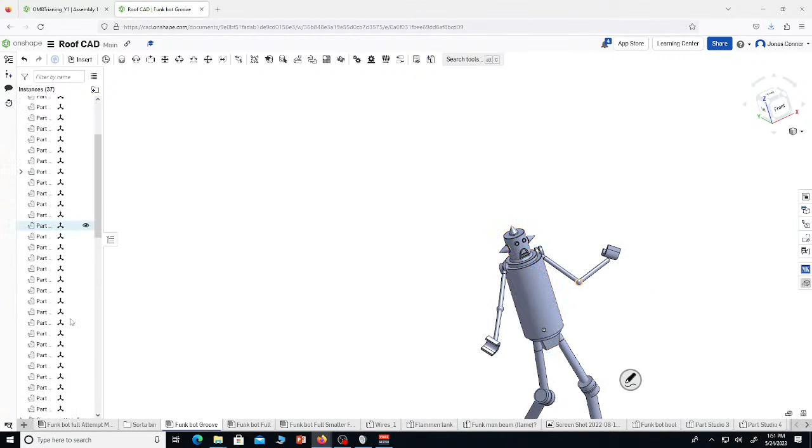And then I made a sketch on the side that extrudes it outward. So this guy's all rigged up with... now he's not like rigged up like a movie thing, but I've got a lot of facets here.

So this is the example where different mates are kind of useful. Now this obviously would apply to like, if I had something like this, I would need ball and socket mates and all kinds of different stuff to do something like this, especially if it actually was a ball and socket mate.

I'd need a ball and socket mate right here to rotate or different things. So on some of these areas, I've got like a ball mate right here that allows it to move that way. I've got rotary mates for the shoulders. I think this is mostly just ball mates, but yeah, I've got a lot of different mates here, and this is kind of one of the applications that you can use for it. This is just made for fun, obviously, but we can go and make us a mock robot arm.

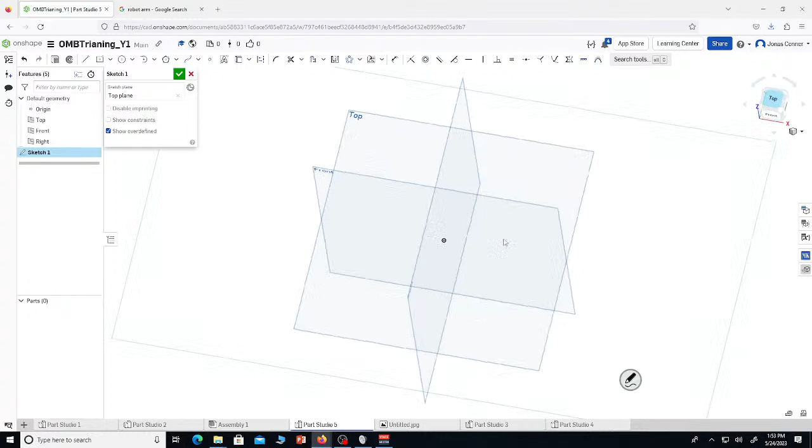Oh, that's odd. Anyway, we'll make us a mock robot arm. We'll just make something, a simplified version of whatever we can find on the internet. Now we're not gonna model this precisely, but we'll get sort of close. So that's like, I don't know, a hexagon, and then it kind of comes out. So we'll just do that.

I'm not going to measure anything out. I'm just going to show the capabilities of the different parts. Then I'll make this go out like here, just to show all the different features. And then I'll chamfer - can I chamfer? No, I can just fillet it. So I'll just fillet it right here.

And then that up a bit. Hit sketch 1, extrude it up a little bit.

People. I don't have anything else to throw. Let me go get me something to throw.

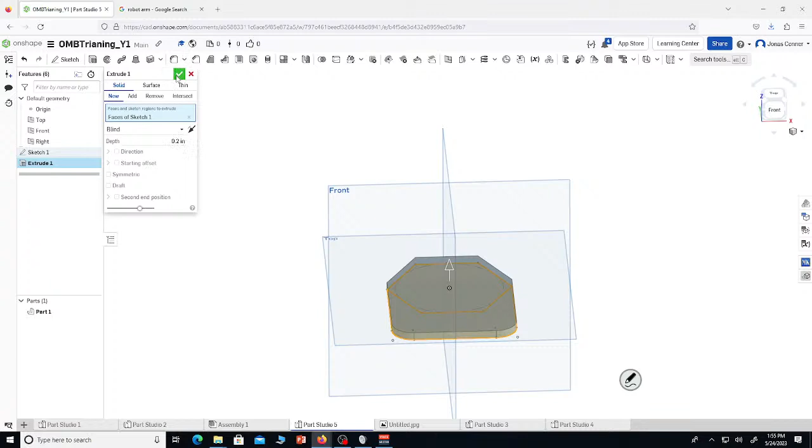Okay, we're back. Anyway, and then I can go into my sketch. I'm not going to offset this. Right here, that's just a circle.

Actually, you know what? We're just going to offset that whole thing the other way a little bit. I'm just going to do this real quickly. Okay, it goes up a bit. And then we'll create like a little bar right here.

So we use the right plane. We'll use this point here to create a circle, extrude it symmetrically. Now what we're going to do is...

Okay, we'll create a new part here. Use that circle right there. What we're going to do is we're going to make a new part. Now it's going to look really weird at first.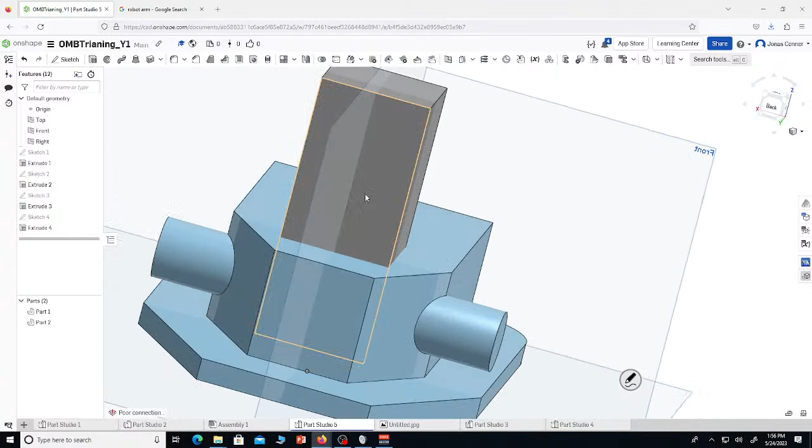And then we'll make that much smaller, a version much smaller. And we'll extrude this up to be a lot taller.

And then what we'll do is we'll transform this. Actually, we're not going to transform it. We're just going to have 2 of these. We'll transform it just to duplicate it. Actually, we're not going to duplicate it. Never mind, I lied, I'm lying, I'm a big liar. We're just going to circle in here.

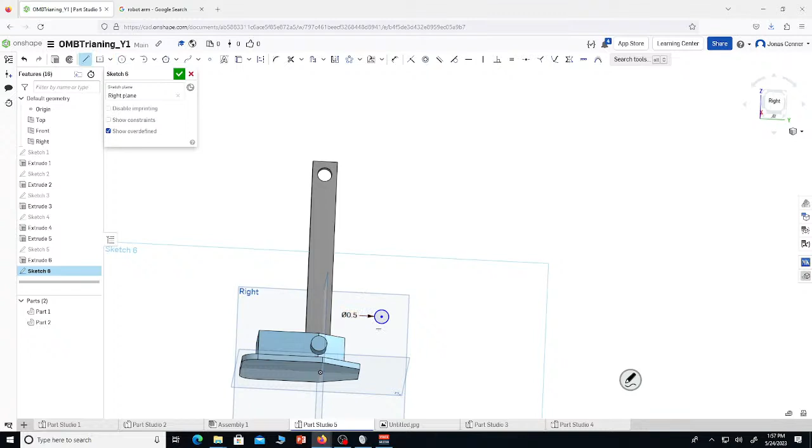Make it like that. We'll measure that just to make sure it's right. Remove that, and then what we'll do is we'll make another part just on the front plane that has a 0.5, and we'll have the center line right there.

And we'll mirror that across. There is a mirror tool that I should have mentioned like hours ago. The mirror tool is quite useful.

We'll extrude this by 0.2. Then what we'll do, in the same part, is unhide the sketch, select the circle, and extrude that as an additive part.

Okay, and then we can go to our assembly. Make a habit of naming parts as you go. Like I can name this arm, and I can name that table. Make a habit of doing that. You do not want to have a robot with 300 plus parts and all of them be named part 1, 2, 3, 400, 750. You do not want that. Trust me on this one.

So we're going to import that arm, and then we're going to hit this drop down and import another one of part 2 and part 3. And then we'll start mating this up.

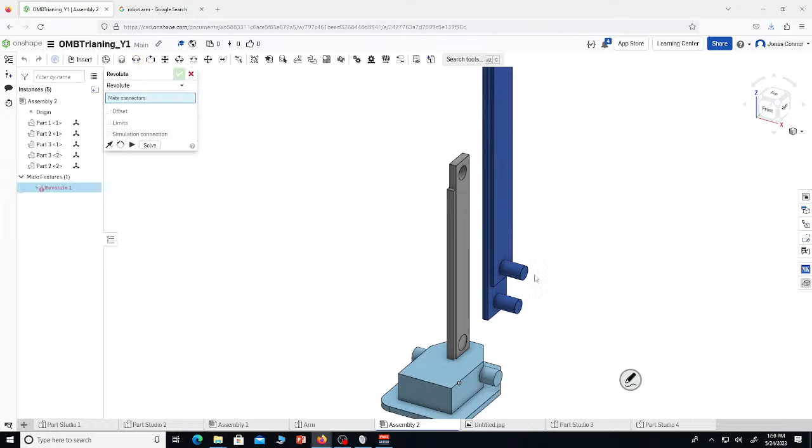So we'll do a revolute mate, and we'll hit this circle right here, and then this right here. Have it go the other way. Rotate it a bit. And then we'll hit that.

If I mouse over this and then hit shift, it'll allow me to just select mate connectors from this. I can align myself properly. No, I don't want to hit that. Mouse over this, hit shift, and then I can mouse over here. And you know, I'll just hide this part. That. Unhide that part. That.

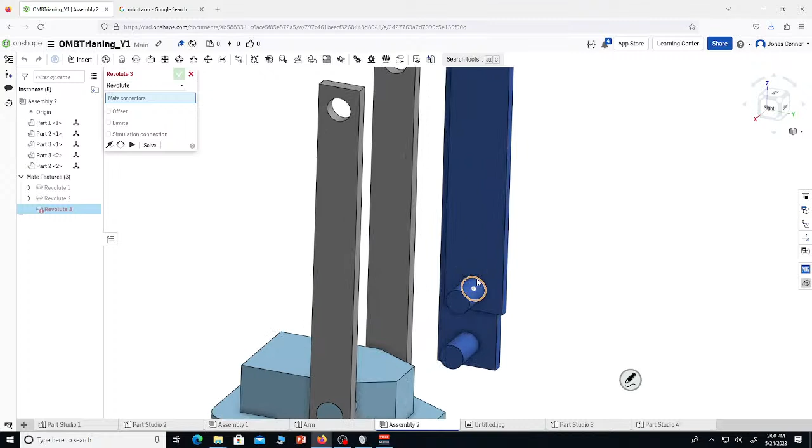Rotate it, make it go the other way. And then we'll revolute this right here. This right here. And select that one properly. Okay, we'll just select the middle right there.

We'll undo that actually. We'll fix this part so it doesn't move. This will be our base. And then we'll add a revolute mate in the middle of this.

We'll select this one, so the middle of this. And then the middle of this. Over.

This right here is for my tablet. This isn't from...

And middle of that, make it go the other way. And then, boom, now I've got kind of a mock joint that I can rotate.

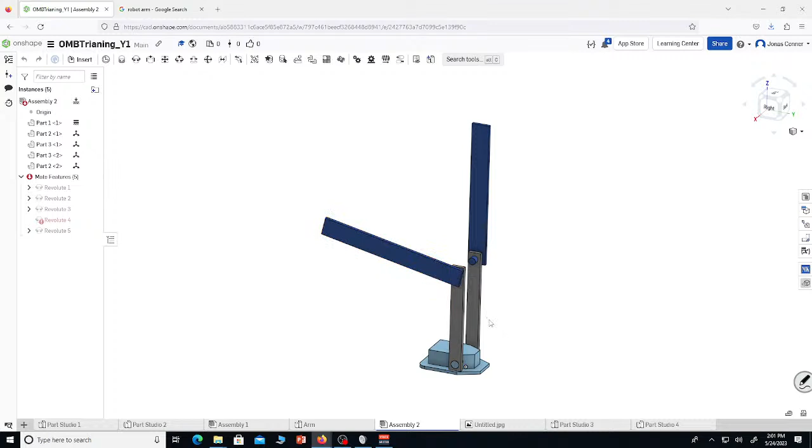Now it doesn't have inverse kinematics unless you add definitions. But now I can say, okay, if this were like a robot arm, for instance, I wish I could open the Megabot arm, because the Megabot arm is completely rigged up, so I can move every part of our robot virtually. And if I were to say, okay, if I'm going to scale, can I transform this?

No, I can't. But if I had, let's just say hypothetically, that this was... oh, I hit the wrong key. I did something wrong. Tablet's messing up a bit.

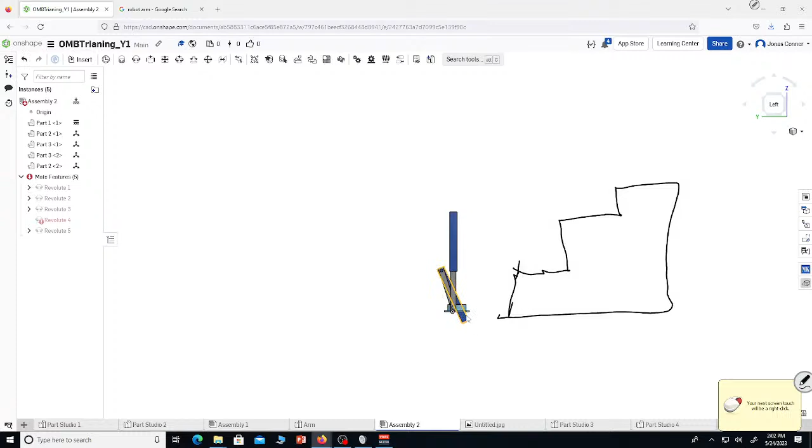Let's say this is our robot, and I've got the chart, the thing right here, and this is the arm that I was using. I could be like, oh, this would totally be able to score a cube, and then I could easily move this up and then move this out and place a cube. Oh wow, look at it, it's so cool.

Or I could say, if this was the charge station, it'd be like, oh, this is our robot, and I could easily import it. Now this is, you know, 4 inches tall, so 16 inches tall.

This is like a small robot. I didn't model it to be big, but if I actually had the proper sized robot, what I could do is just go over here, say game elements.

I could easily move this over, and if this robot wasn't 16 inches tall, I could easily say, oh, it's gonna reach over and grab that, and I could test and see virtually if it was gonna work.

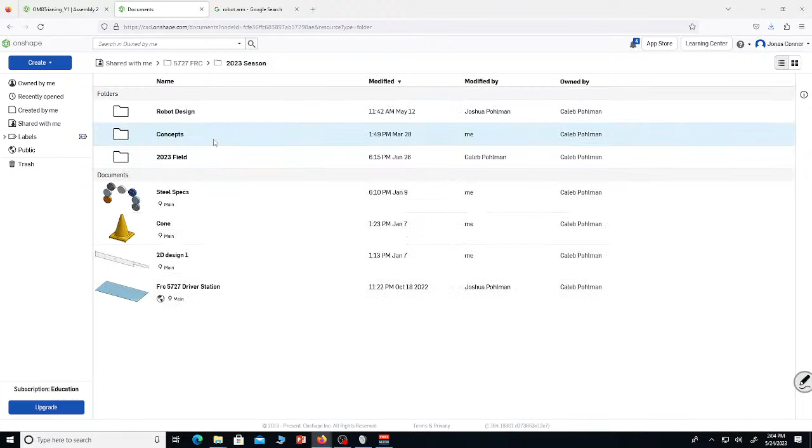Well, maybe I can pull up a file that isn't as complex. I know that one of our... oops. This is some of our robot concepts. This is going to be our old one.

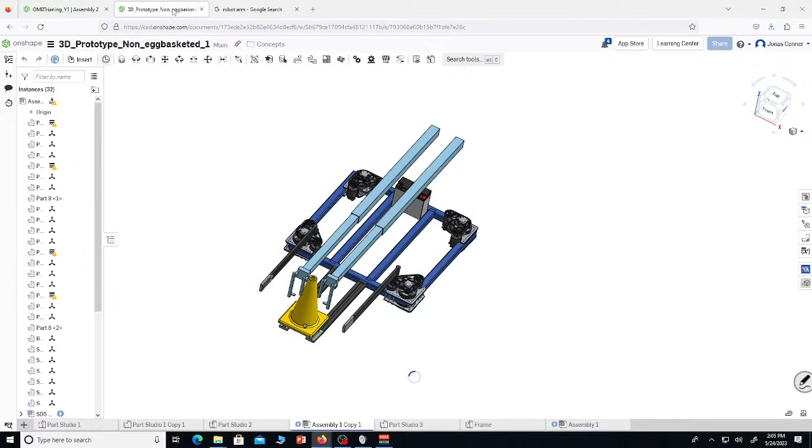But another example - I think I have one of our full old robot designs. Not sure where it is. We have our field elements in here. There it is - here's one of our old robot designs. This is the prototype for our current robot. This was like the early prototype. We didn't build this, this was in CAD.

This is the first time I've ever shown anybody our failed designs, so you dozen people listening in get to see them. I don't think even Andrea has seen this robot before.

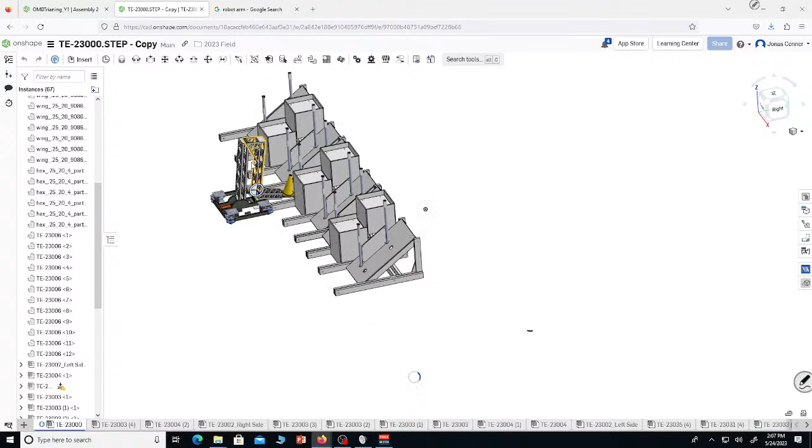So I can grab this. A lot of this is the parts, so like that PDH and the breakers and things like that, that has a lot of vertices. That's probably the majority of what's causing the slowness.

But I can grab this - I should be able to, at least. Grab it and rotate it. And I could say, okay, this could go place on mid or high or whatever, whilst being able to fold up into the chassis. So I can fold this out and have it go all the way up there and test it.

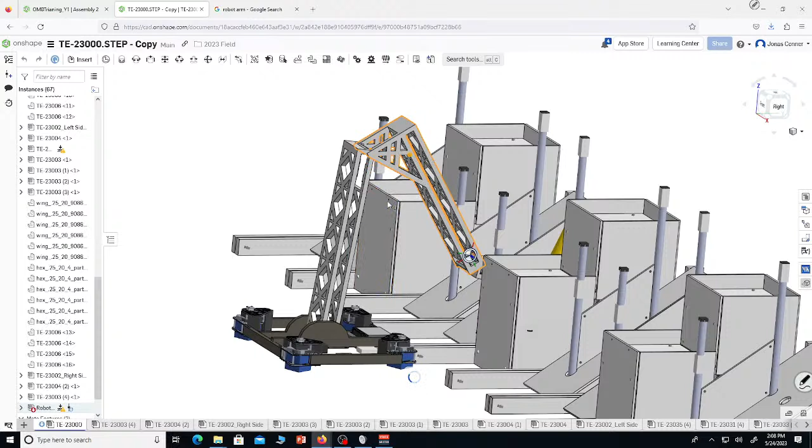And I tested this extensively. But I could say, oh, this will... yeah, it'll be a bit. This computer is not the fastest, but if I were to put this model in SolidWorks, it would just not open, or it would crash. So there's something to be said there.

Usually the people who really like working with SolidWorks as a team are the people who have like 2080 Ti's in their computer and they have 32 gigabytes of RAM. If you've got - we run our Onshape on MacBook Airs, the M1 MacBook Airs, the ones that keep blowing up on the screens, the real bad ones that are 8 gigabytes. And we also have a set of Intel iGPU laptops that are about 10 years old, and they run Onshape just fine with virtually no lag.